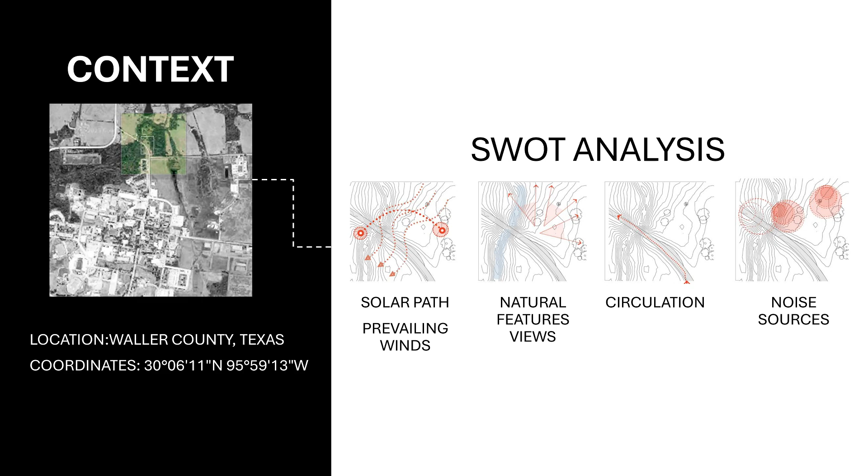At the site visit, I was mainly looking at a lot of the clearings and a lot of the natural views that were coming into the site without there being construction on it, and so I really appreciated this shot.

All of this led to my first and second iterations. Keep in mind, I wanted to have the views be a big part of this.

So for my first iteration, I have this hallway where the wall facing the lake was covered with history of Prairie View and the site, and then the other side being open so that way you can still get that view of the trees and of the sun, all the natural light, and then you come out into the monument.

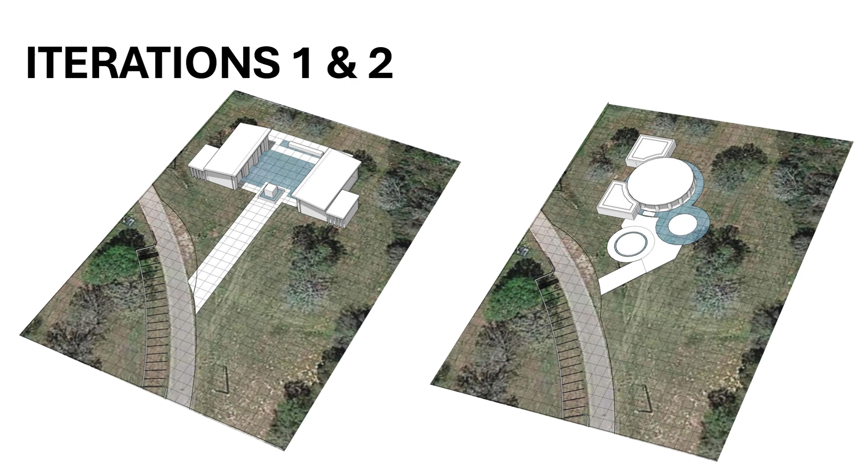After this, we really started leaning into precedents, and so my precedent studies were Temple Aldeia in Sao Lorenco and Dr. Vishnuvardhan Memorial Complex.

The things that really stood out to me was the geometry of Temple Aldeia. The architect Edson Muniz could fit a lot of meaning and a lot of tranquility with very minimal shapes, the main shape being this right triangle that you see. It really made me start thinking about the different types of shapes I'm using in architecture, because never once had it occurred to me that you could do that.

In Dr. Vishnuvardhan Memorial Complex, I really liked this centralized hierarchy that he created, and so I wanted to study what makes a hierarchy. I also really liked the circular building, so that way you had to go into that building and participate in that circulation in order to get to the centralized hierarchy.

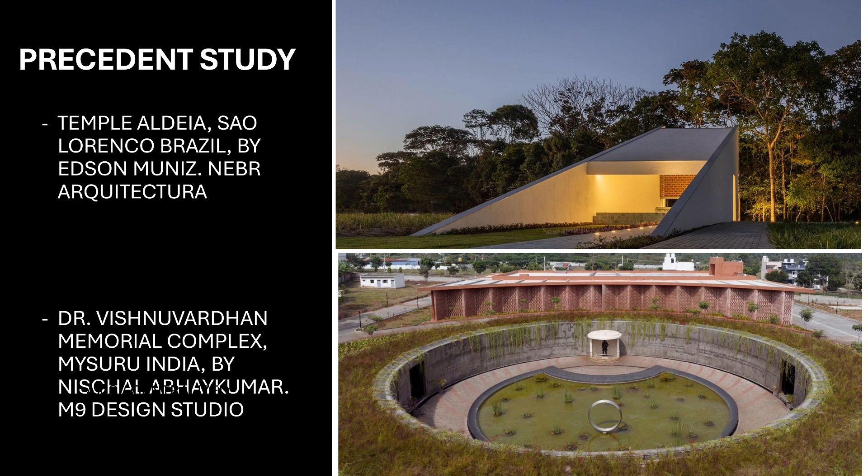To carry on with the circulation thought, the first circulation I looked at was Temple Aldeia's. I thought that the circulation was really weird. I'm like, why are these two pieces broken up? But then I really looked at the concept of Temple Aldeia, and I realized that this is actually perfect for this site.

Because they wanted to test what makes a space sacred, and they did that by creating a very simple space. But then these two parts, the pathway to the temple and the exit to the temple, are completely separated. There is this little gap in between this concrete slab that completely breaks up the form of this project, but you have to take this bigger step in order to get out of it, which kind of to me signifies this movement from sacredness back to secularness, which I thought was very interesting, the way that they did that.

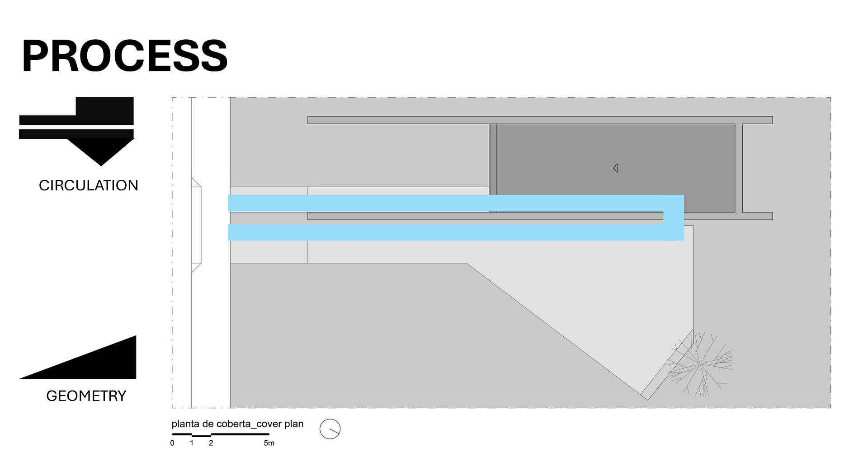For my sketches, I really wanted to hammer on the geometry, the structure, and the space, because once again there is a change in space with Temple Aldeia, and so I wanted to show that with this platform on my partie and this bottom part of my partie.

I also wanted to create a model that stood by itself with very simple geometry, so every shape that you see in this partie is triangles.

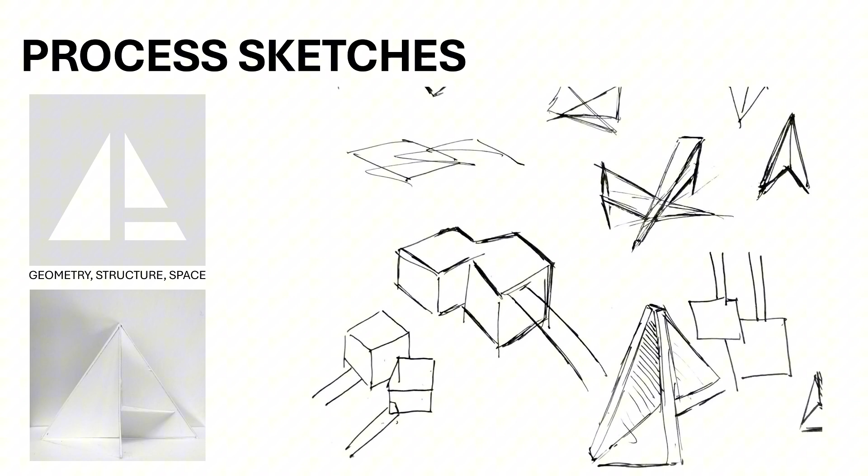Moving on to Dr. Vishnuvardhan Memorial Complex, I once again really liked the circulation of it, and I like that you had to interact with the circular building in order to get to the centralized hierarchy, so you appreciate it more. But I also wanted to look at what makes a hierarchy, and I found it in this piece. The center pond, the central pool, really has this visual interest in it. Whenever you walk in, you can see the statue in the end, you can see the monument in the pool, and it really just makes you intrigued and you want to know more about it.

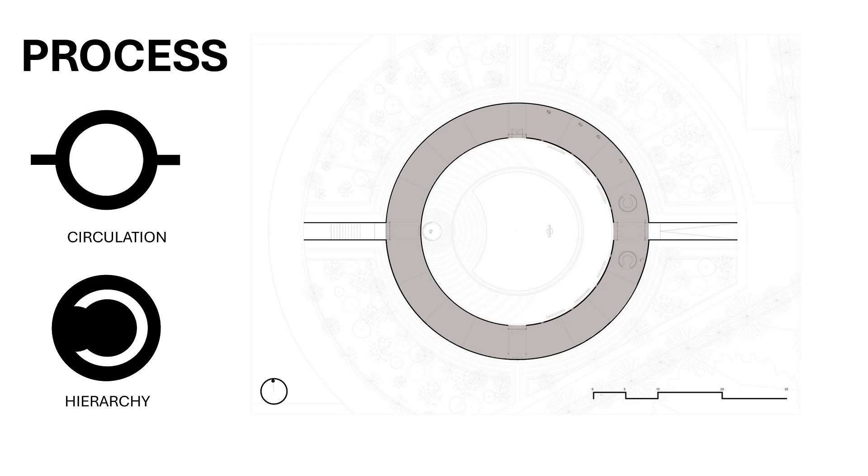For my process sketches, I really wanted to once again discover what makes a hierarchy, and I wanted to also hammer on that circulation that I was so interested in. So I created this partie that is circulation and hierarchy, and my concept word was interlude, because I wanted there to be this participation in the circulation, and then finally you get to the moment of rest, or the interlude.

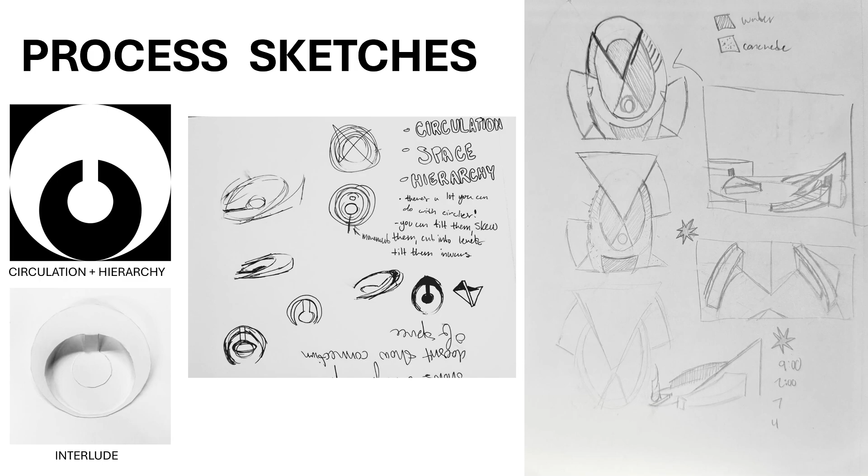All of these precedents and parties really informed my sketches for my third and final iterations, because I wanted to create the simple geometry with the circulation and the centralized hierarchy, and I was able to do that. So with my third and final iterations, I created a large dominating triangular space, and then these pillars in the center pool, which were inspired by Dr. Vishnuvardhan Memorial Complex, because once again there were the monuments inside of the pool, and so I really wanted to bring that out in my design.

And then the dominating triangle from Temple Aldea with the changes in space and the changes in triangle.

For my floor plan, I have my public sacred space, I have two private sacred spaces, I have a lounge at the front, and a museum with two sides of outdoor exhibits, and my bathrooms.

For my monument, I have the memorial pillars with a second connecting part being the outdoor space where you can walk down into where the monument is and you can see it from a lowered standpoint.

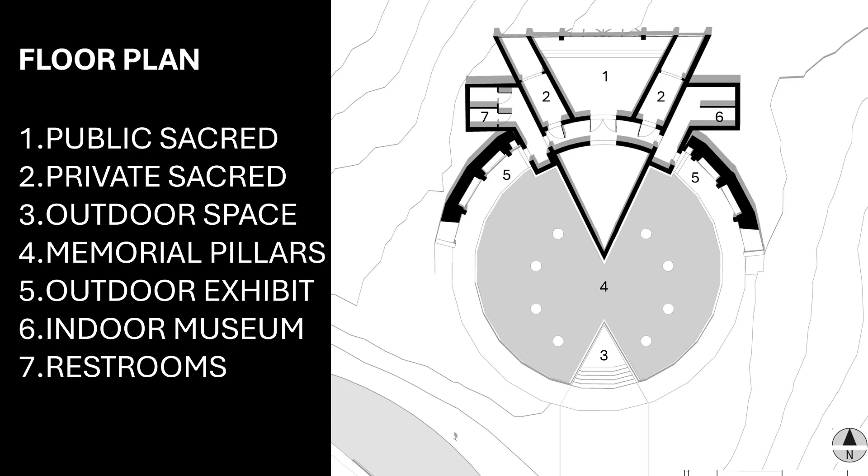For my elevations, I wanted to show off the triangular motifs that I have throughout the building, which is mainly shown through windows. I have this window area that is all triangles that serves as a viewpoint to the monument space and to the sacred space.

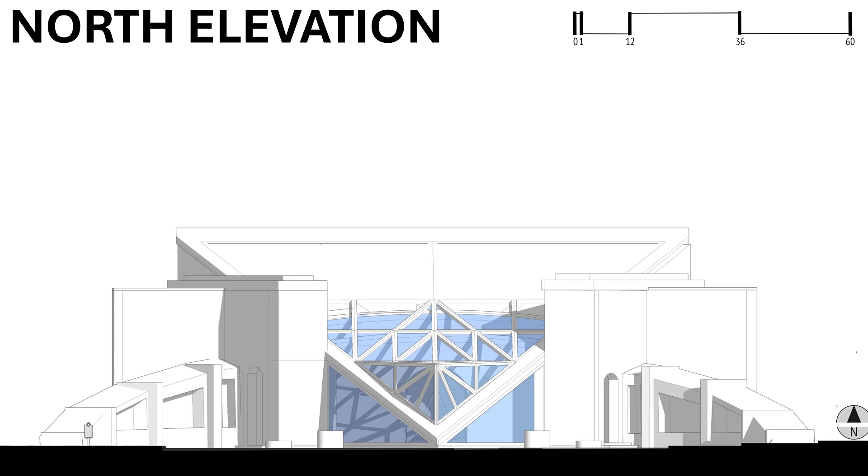For my sections, I wanted to show off how the space was divided, with the lobby being in front, the hallway being in the middle, and then the sacred spaces being on the end.

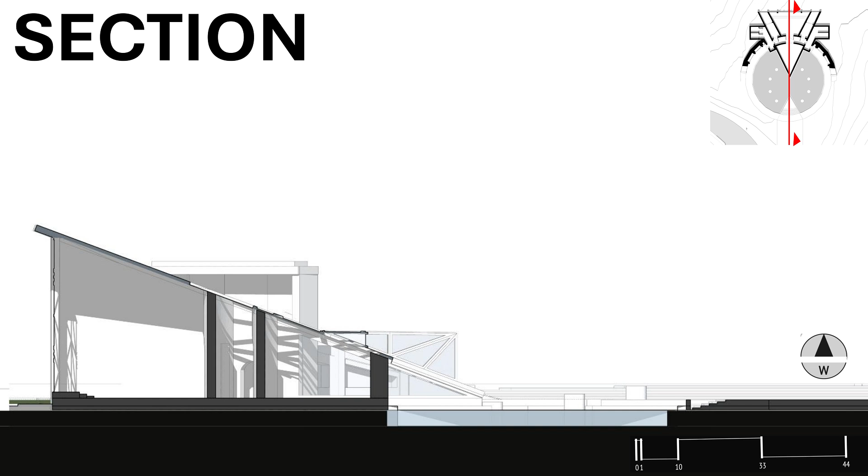The materials I used were inspired by Dr. Vishnuvardhan Memorial Complex, but then also shifted a little bit with the white from Temple Aldea. I used whites to really hammer on the purity aspect of it, the sacredness of it, because white reflects light very well, and there's a lot of natural light in my building. And I used brushed bronze to once again elevate it a little more to make it feel more regal.

But then I humbled my sacred space a little bit with the natural elements. So a lot of wood was used in the sound absorbing panels, because once again I said that there were gunshots being heard from the site, and so I wanted to create sound absorbing panels not only to acknowledge that, but to keep sound out from the sacred space and the private sacred spaces, so that people would be free to make as much noise as they need to in their space.

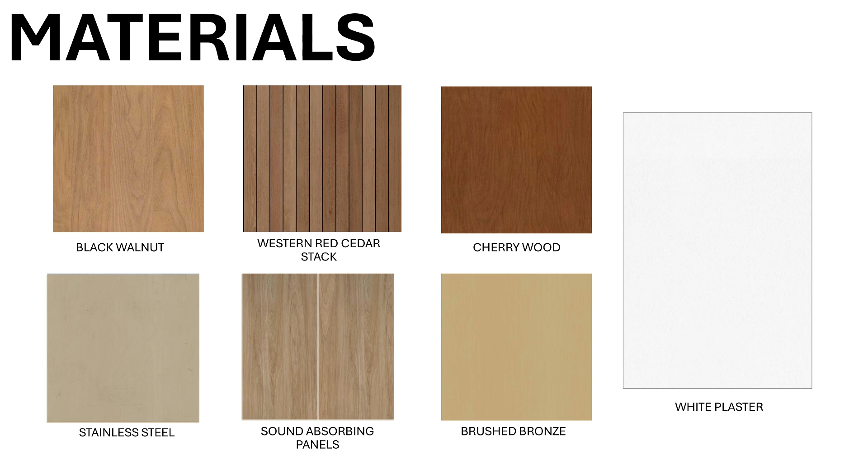Here are my rendered shots. Once again, this is Tri-Faith Summit. My concept was legacy, with the concept statement being: the excellence of legacies will endure despite the pain of hardship, time, and loss.

This was really important to me because the memorial pillars are there to honor the 8 original students at Prairie View A&M University. Prairie View went through a lot of hardship in order to establish itself as a university, and I really wanted to highlight that while also having moments where viewers themselves can highlight that.

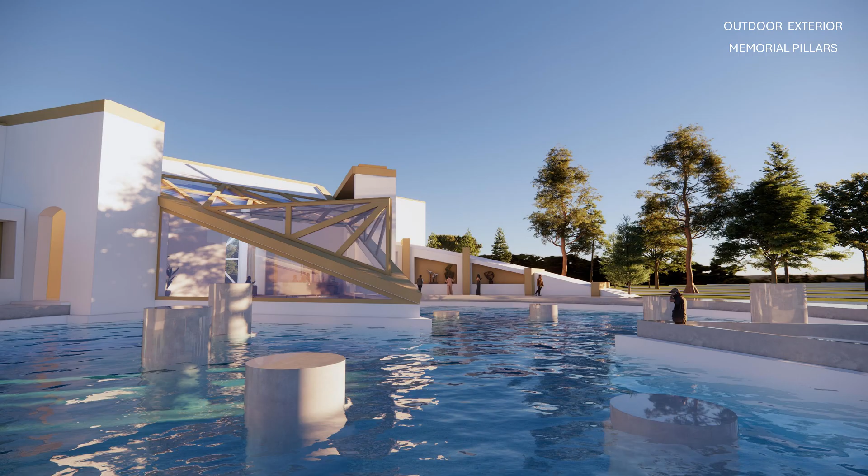As you're visiting the outdoor exterior, you can go down into the outdoor space and be greeted with everything. The lot is organized so that when you're standing there, you are in the direct middle of it all. Whenever you look, the triangular space takes up your entire viewpoint and expands your vision subconsciously, so you are looking towards the future while being part of the present, while also coming from the past. There's a time dynamic here that I really wanted to emphasize.

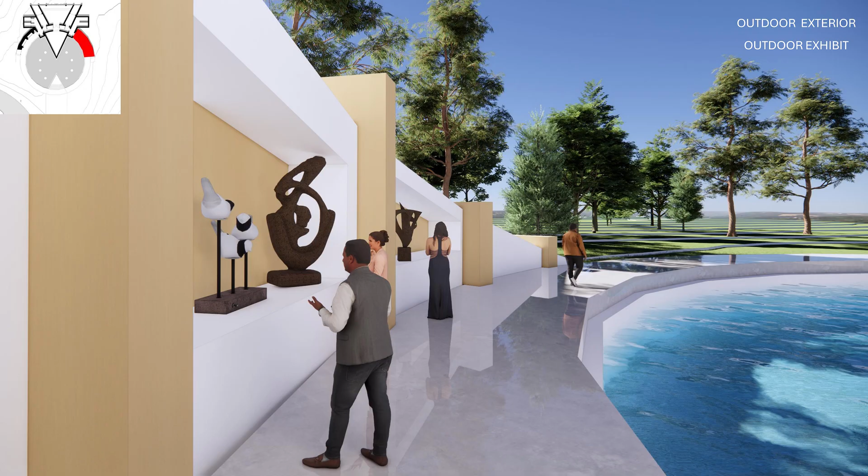With the outdoor exhibit, I wanted there to be a way where people could donate art so they could learn more about the history of Prairie View, but also more about the culture, and have a way where people can still interact with the sacred space if they don't want to participate in any worship or activity happening inside.

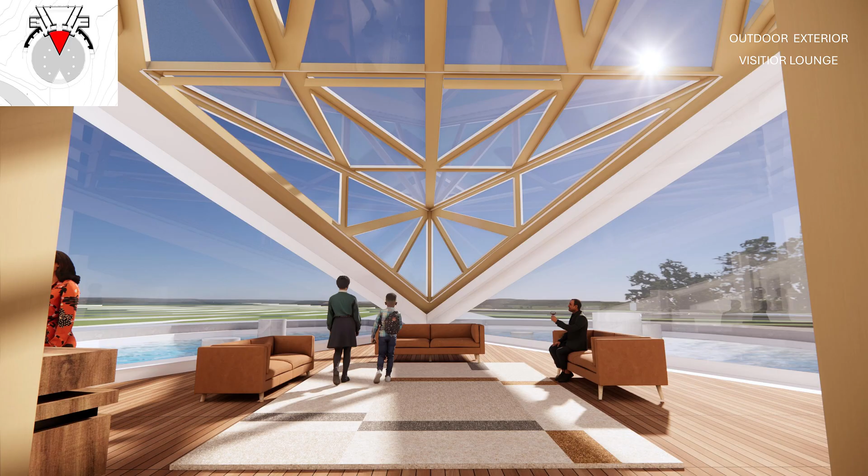I have my visitor lounge here in the middle. This is a moment in and of itself because the windows come to a point right in the center where you can see the future from the present in which you're in. Everything is guided to this one moment, and you are also looking at the people standing at the platform. So it's both sides being able to look at each other, but also being able to just be around everything. It makes you feel very present and very connected.

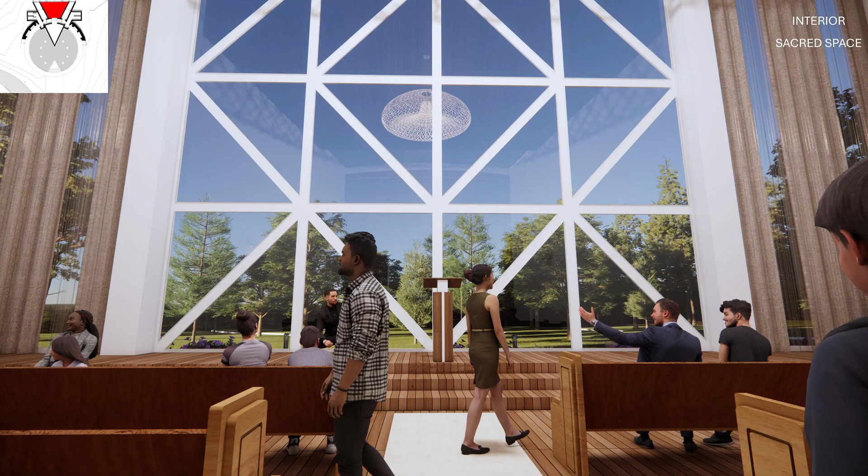For my interior sacred space, I once again have this window with the triangular motifs. What I like about the sacred space is that it doesn't get a lot of sunlight, but it does have a lot of natural light, which is good because the wall is made so that when the sun goes over, it doesn't have a lot of direct sunlight into the building, since that would blind the visitors. But you still get that moment of looking at nature, with the curtains on the side breaking up the space so it's not just a full window.

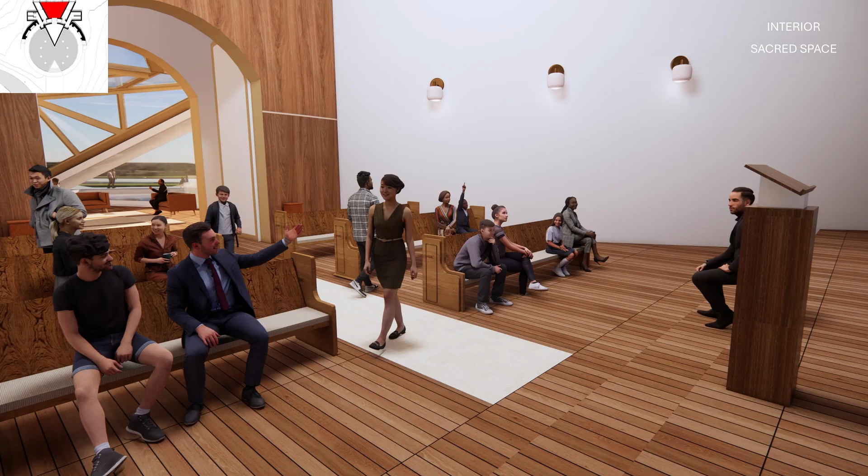For my other sacred space shots, I really wanted to highlight the community that happens in sacred spaces. It's not always about religion—sometimes you just need the community. So I have these moments where people greet one of their friends, a family comes to church, side conversations happen with the speaker getting ready to speak to his crowd. There's just a lot going on because community was a really big aspect that I wanted to tie in.

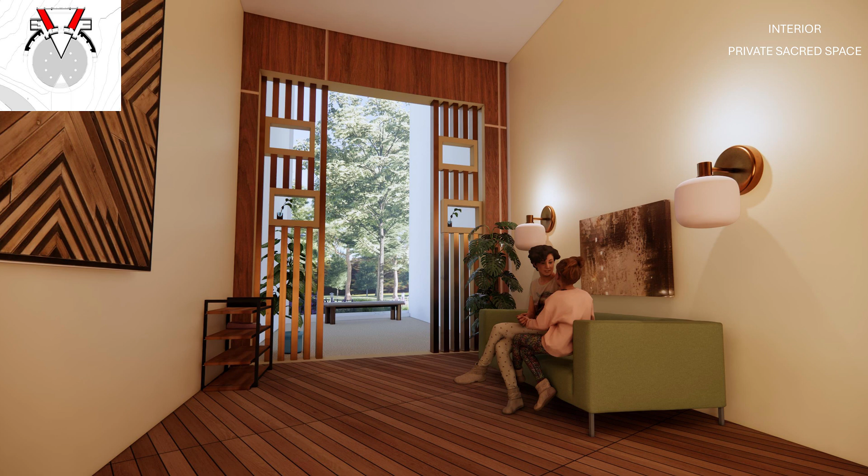For my private sacred spaces, I set it to be very comfortable and cozy, because typically people go to sacred spaces when they want a moment with themselves. They want to sit and think about everything going on with their lives, and really confront their troubles, and sometimes that's not always the most comfortable thing to do. So I had it in a very cozy and homey way.

But then whenever you are ready to leave that section and go into the other section marked with the partitions, there is a way for you to do it and really interact with the space by taking off your shoes. That's why there's a shoe rack there, because the floor is carpeted and you can really be out there with nature. So it's like you're having a moment with nature, but you're still indoors and air conditioned, so you can just be.